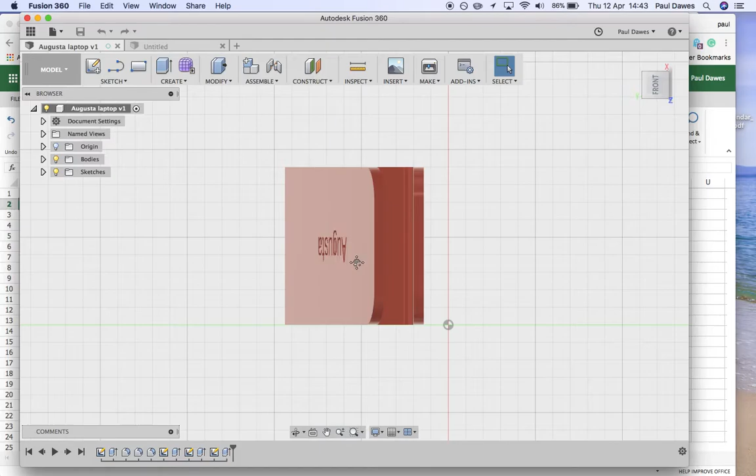When you open up Fusion 360, there's a couple of areas you need to know about on the screen. The first thing is this view cube. That's the thing that allows you to move around, rotate around, and if you end up zooming around and get completely lost, you can hit the home button and that'll take you back to the very first part.

Along here is the history timeline. I can go to various parts of my timeline and make modifications without affecting anything I did further on. So it's like a Control-Z, but you're only making modifications to the one thing you want to change.

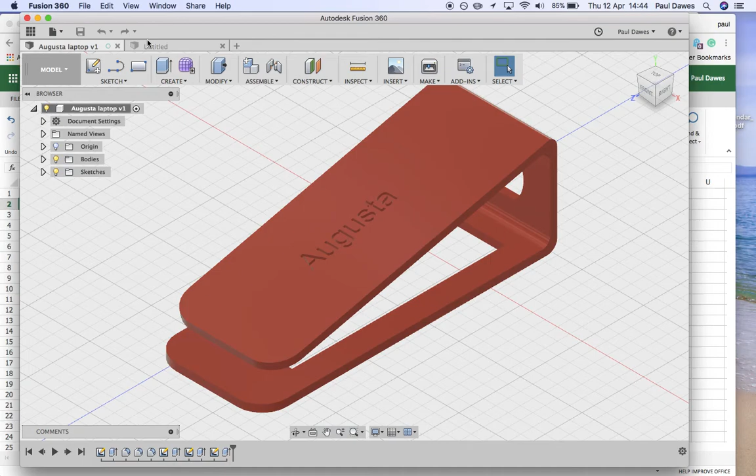So I'm going to start by opening up a new document, and the first thing I'm going to do is save that as a laptop stand, whatever I want. What I'll do is start by drawing in 2 dimensions first.

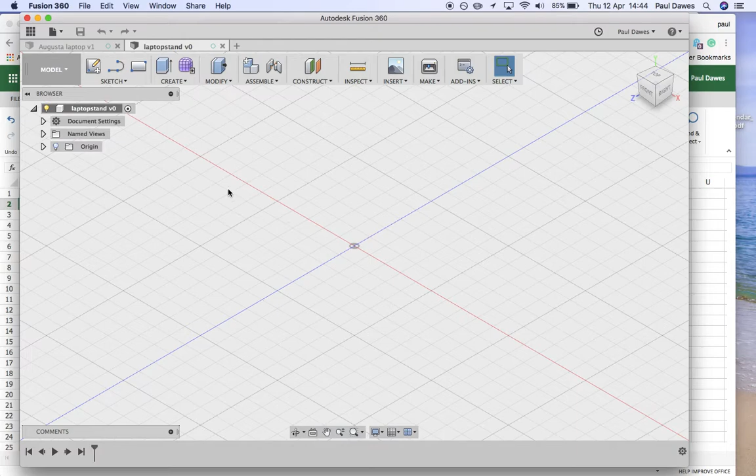So I need to create a sketch, create sketch, and I'm going to draw on this face, the YZ plane.

The first thing I'll do is create the base part. Can you see how that's highlighted? I'm going to have a 5mm thick piece of acrylic, and I'll make it by clicking my tab. I'm going to make it 140mm across. Hit enter, and I've got my first part.

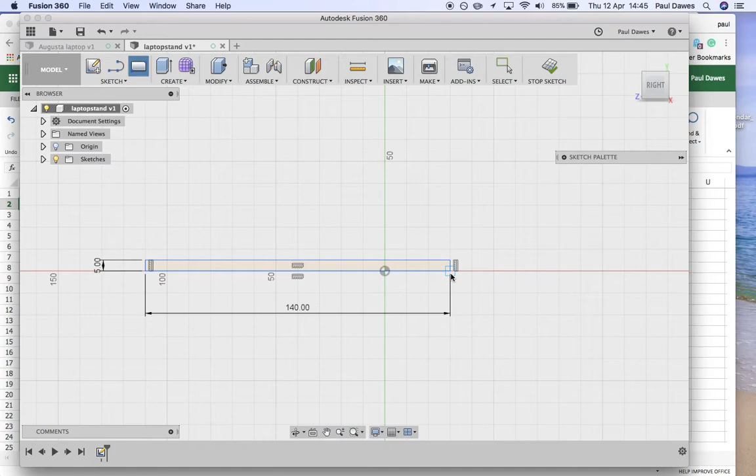I'm going to do another rectangle, and this time make it 40mm tall, tab, and still 5mm thick. The next one's going to be a little bit more difficult.

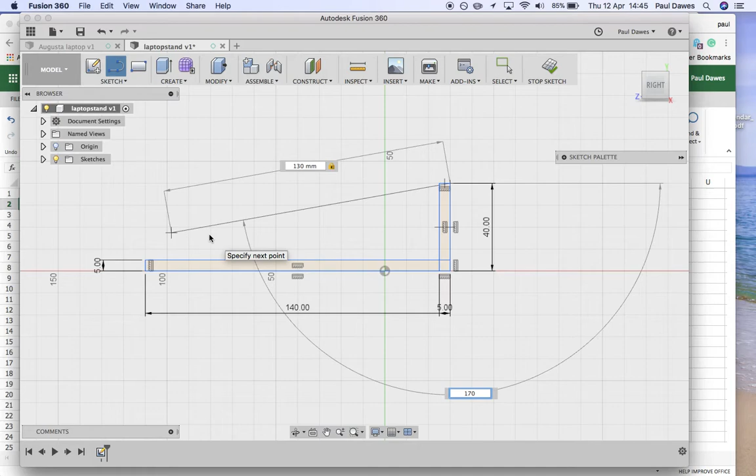I'm going to do a sketch of just a line. I'm going to draw a line from there, and make the line 130mm long, and the angle 170. Does that look alright? That looks alright, yeah. Enter. So I've got a line there.

I haven't got any thickness there yet. What I'm going to do is go sketch, offset. I'm going to offset this here, 5mm thick. Enter, and I've got that.

So now all I need to do to turn that into a full sketch is close it up. A line from there to there, and a line from there to there. Can you see how it's all gone yellow now, or orange? That means it's a full shape. Before, this was just joined with lines, but now it's a full shape.

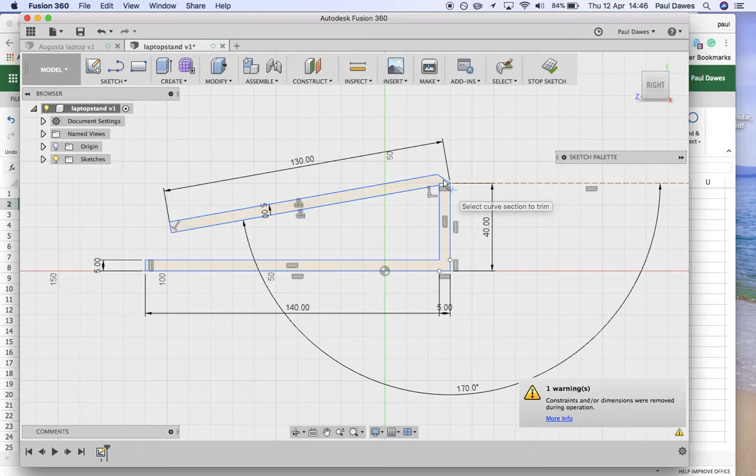I'm going to finish by trimming off the lines I don't want. So I can go sketch, trim. I can delete that, that - oops, Command Z. No, I'm going to leave that like that. I'll delete that there. Trim, yep, and I'll trim that off as well. Okay, how does that look?

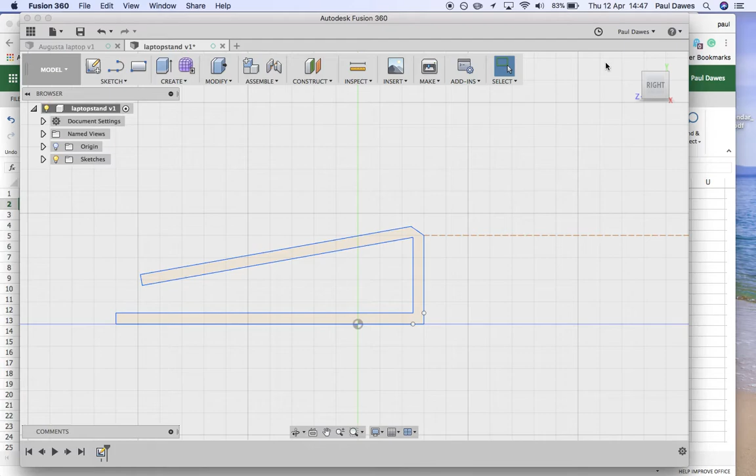Looks alright. So I've finished my sketch, stop sketch. I can go back home and you can see that's what I've got. Now all I need to do is extrude.

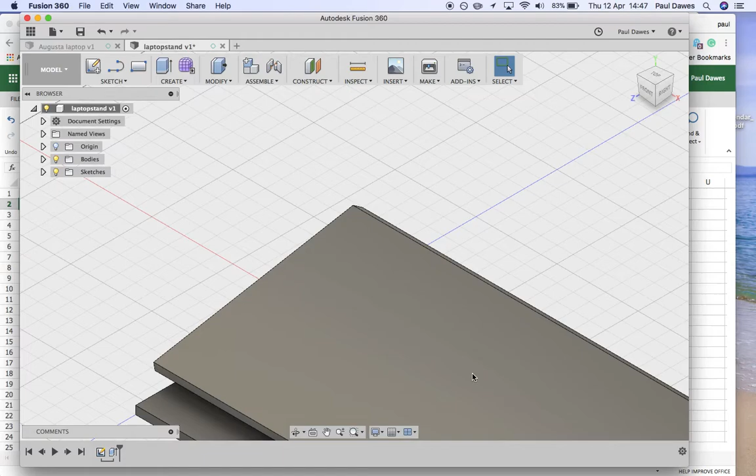So I can grab that component there and drag it through. Now I want mine to be, let's say, 230mm. Okay, enter. Yeah, I've got this. If I hit the home button, it'll take me back and show me the whole thing.

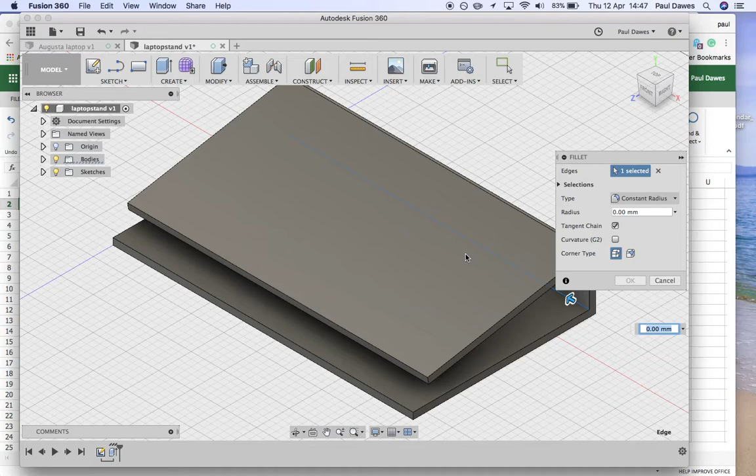So I've got that. That looks alright, doesn't it? A bit boring, but it's getting there. Now I'm going to show you a couple of really basic things to make that look a little bit more interesting. For a start, I'm going to make this look like it's been curved. So I'm going to go and fillet there, sorry, trying to.

I can't get in there. Can you see there? I'm going to fillet that about 3mm. Okay, enter. Now, there you go. Sorry, my mouse is playing up.

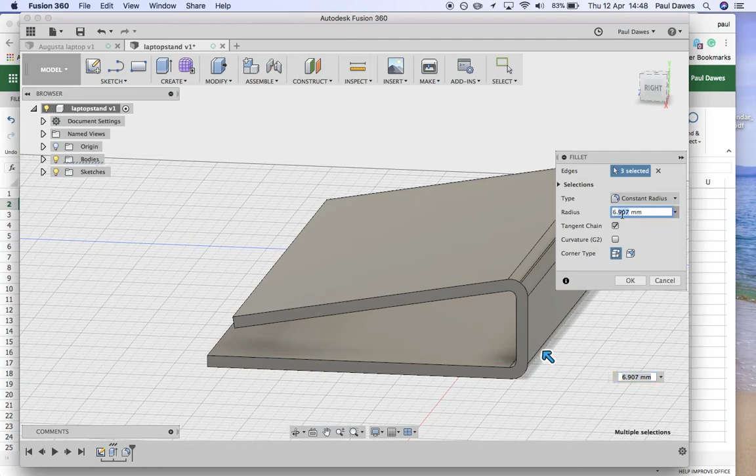So that looks okay, I filleted that. I'm also going to modify fillet that, and that. Let's see whether I can make that look pretty nice about there. What do you think? It's 6.9 millimeters, I'll double click on that and make it 7. See how that looks, that looks good. Yeah, that's starting to look like a proper laptop stand.

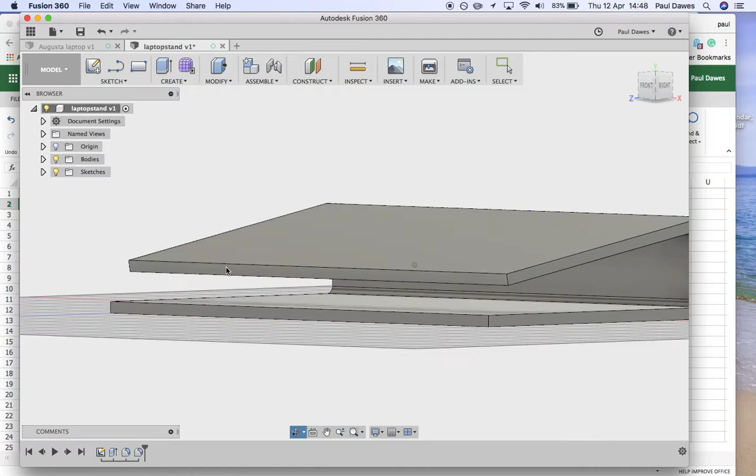But what I need to do is I actually need to have a little lip up here, don't I? How am I going to have a little lip up there to stop the laptop from falling off? Okay, I'm going to go around there. What can I do? There's a number of ways of doing things. What I could do is I could draw a little thing on there and drag it up. Oh, that's what I'm going to do.

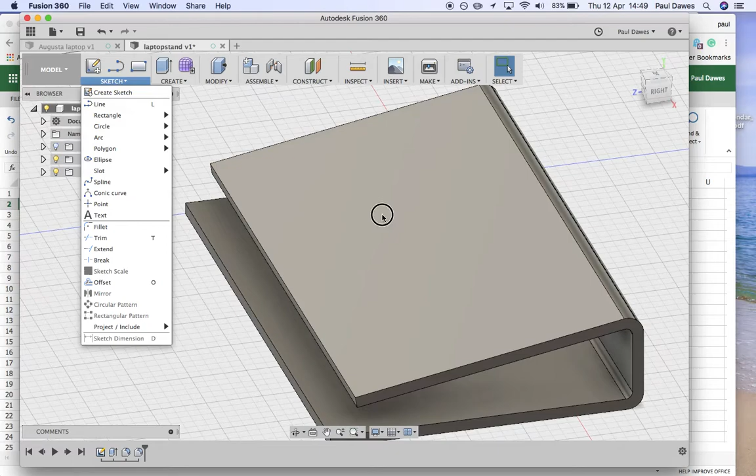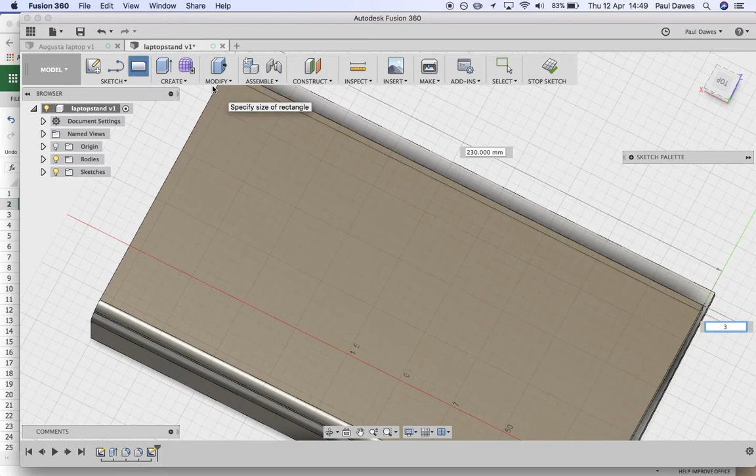What I'm going to do is draw a sketch on this face here, I'm hoping, and then create a box that is how long? 230 millimeters long and 3 millimeters high. So I'm going to go 3 millimeters high and 230 long. Enter. Stop sketch. Go back home.

So that was a bit confusing, wasn't it? Now I've got this line along here. What do you think I can do with that? I can go create, press pull that up. How high? Maybe about 7 millimeters high. I've got a 7 millimeter high thing there. And then I can go and fillet that and fillet that.

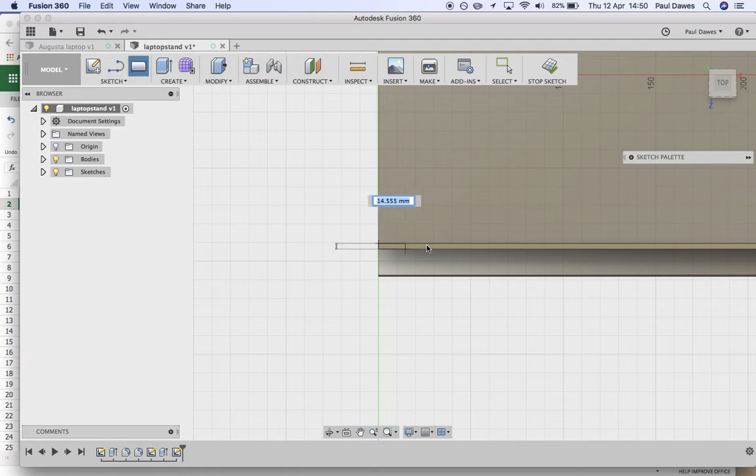I don't really want it to go all the way across. So actually what I'm going to do is I'm going to draw another box on that face. I'm going to make that 3 millimeters by, say, 60 millimeters. Oh, did I do that right? By 60 millimeters. Enter. Okay, and then panning it across, and I can pan by holding the scroll button down and moving my mouse.

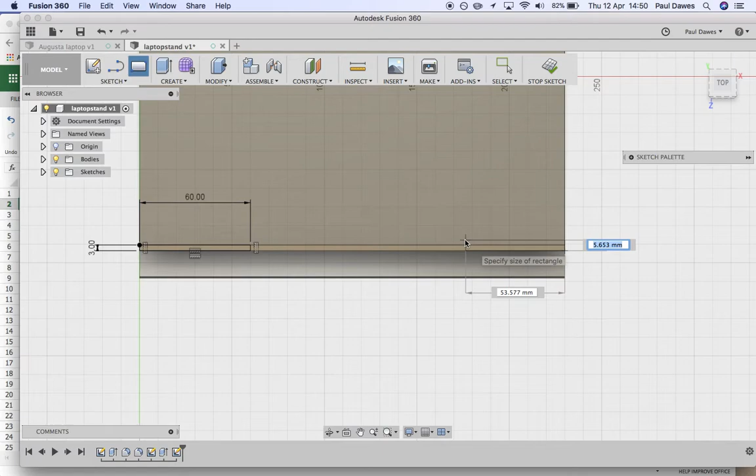And then I'm going to do another one here, 3 millimeters by 3 millimeters by 60 millimeters. Enter. Okay, stop sketch. Now I've got that and that, and what I'm going to do is I'm actually just going to push-pull that part down. Yeah, I don't really know how down I want it. Do I want to go all the way down? What I can do is I can go down to, not to a distance, but to an object.

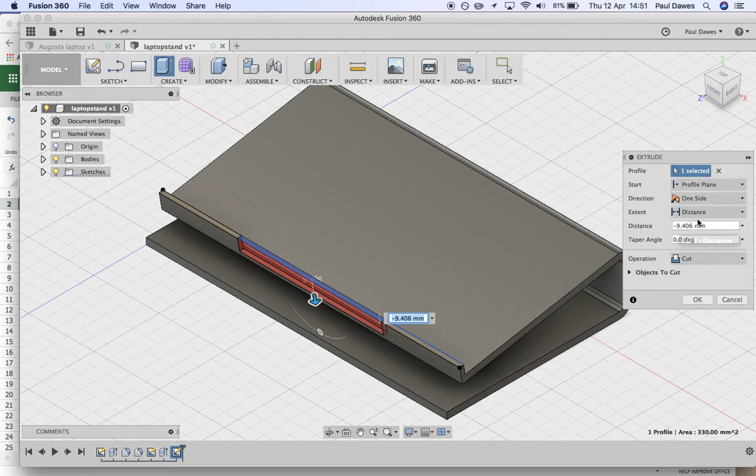I want to go down to that object there. I want it to be flat. And I'm going to hit OK. Yeah, so now I've got that. And now I can do all the nice pretty stuff.

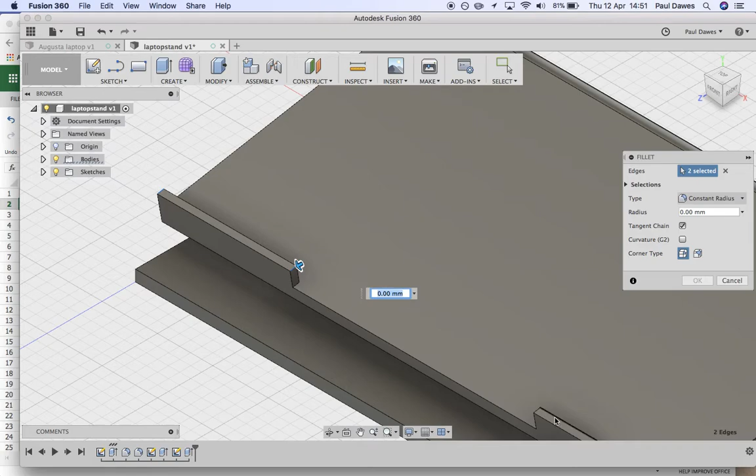So I can fillet that line there, that line there, that line there, and that line there. I can make that all filleted. Oh, that looks good, doesn't it? It's about there, I'll make it about 7 millimeters. That looks good, and it's starting to look good, isn't it?

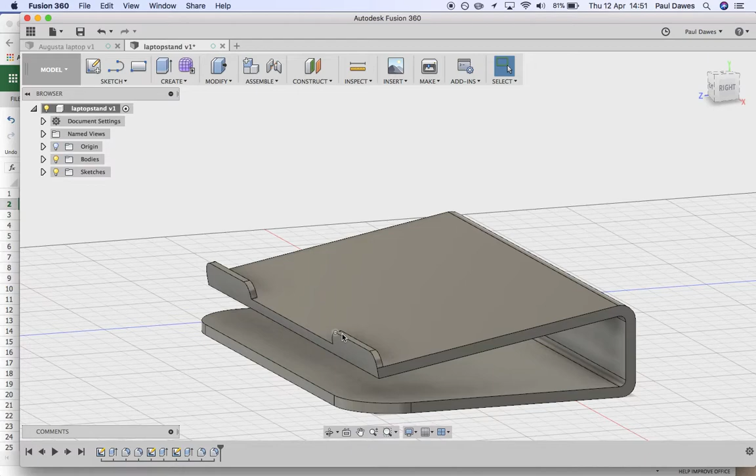Maybe I'll fillet that and that as well. So that's looking good. And then the final thing I'm going to do is, let's go back to home. The final thing I'm going to do is put some writing and cut a hole in there. So I'm going to do a sketch, create sketch on this face here. I'm going to create a box that goes from about there down to, does that look right? To about there. Okay, stop sketch.

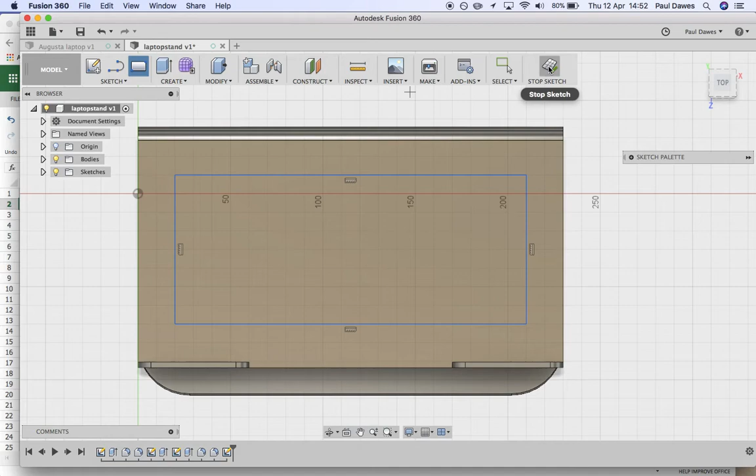And then again, create, push pull, just pull it through. If I push it too far through, I'm going to go through the bottom as well. So I'm just going to go through about that far there. I might go through the bottom, I'm going to do that. How does that look? That looks cool, doesn't it? And now I'm left with that. Oh, that looks much better.

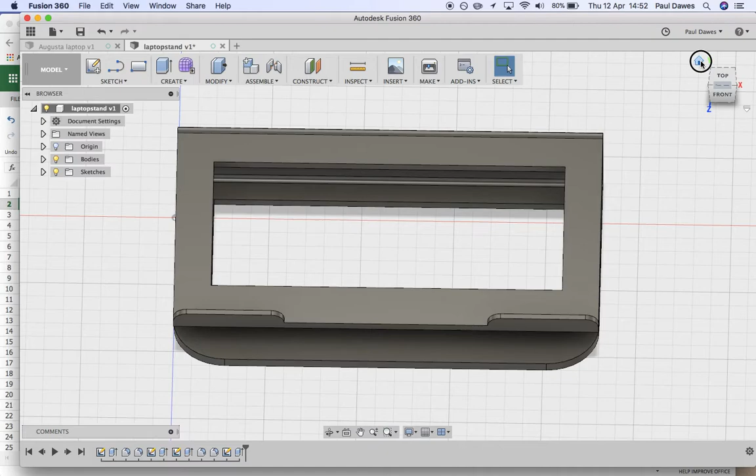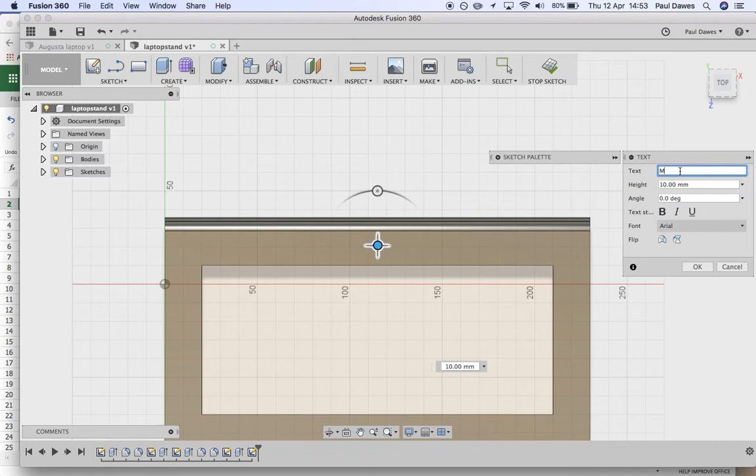And then I guess the final thing I'm going to do to make it look really good is put my name on it. I'm going to go sketch text on that plane. See that little triangle? That means it's the midpoint, so I'm going to put it right at the midpoint. Text, I'm going to write Mr. Dawes, and make the font height 10 millimeters, angle 0 degrees.

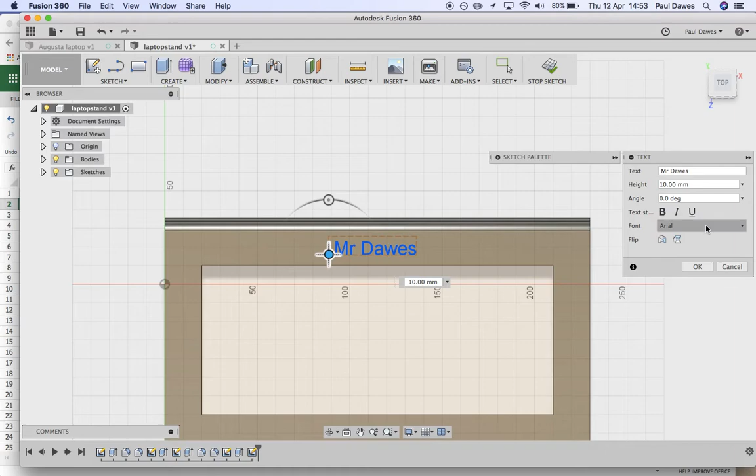I want to move it over to there a bit, that looks a bit better. And Arial, whatever, bold, yada yada yada, you can choose. Hit OK.

Stop sketch, and I've got that in there. What I'm going to do is pretend that it's been etched in, so I'm going to etch it minus 1 millimeter. Can you see that? It looks like it's been etched in.

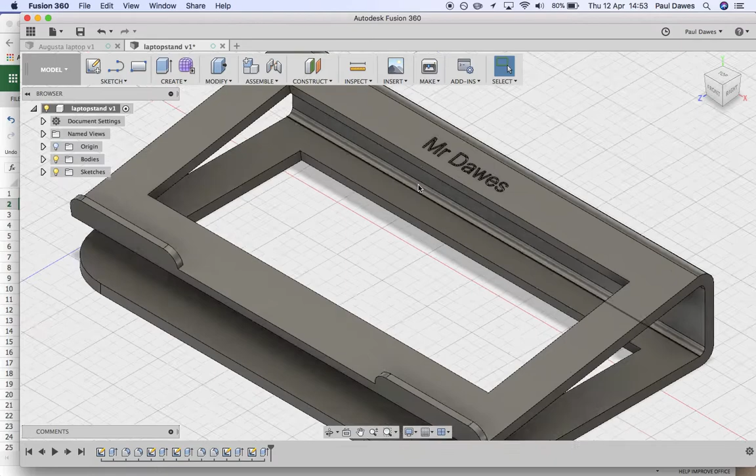So if you're wanting to make your laptop stand look a bit more interesting, you're going to be doing little graphics and things like that. Maybe you've got a symbol you can choose, or you could bring one in as a JPEG or even as a Corel Draw file. You could insert it here and then do the push-pull.

After this, other things that are really important to do are things like filleting. Filleting is a really important thing and it makes it look good. You could fillet the edges here, but with a laser cutter it's not going to look like that. You could also fillet this and not make it so square, make that round as well, but I'm not going to bother doing that.

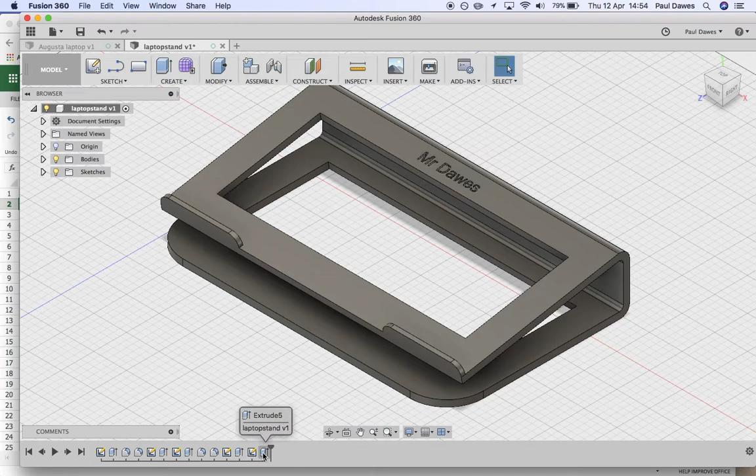What I am going to do though is show you how you can make some changes. If I go through here, this extrude and sketch is actually the Mr. Dawes text, and the previous extrude and sketch was that one there. Now I've decided I don't actually want to extrude all the way through both of them, only through one, through the top.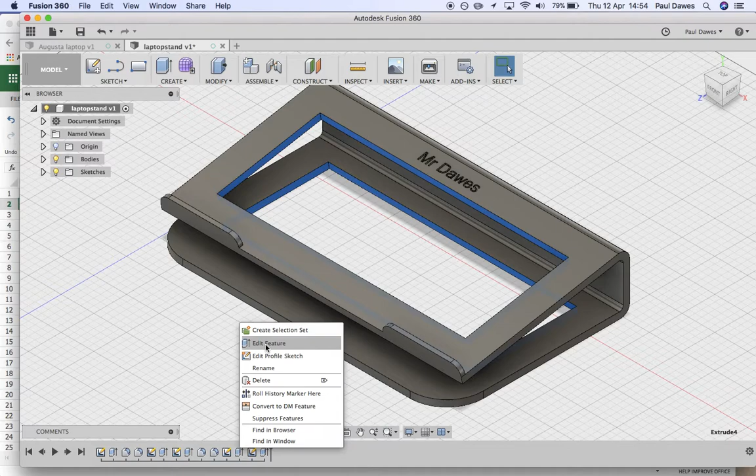So I'm going to right-click on this and edit that feature. At the moment it goes down minus 100, I'm going to pull it back so it just goes through the first one, and hit OK. You can see it's made the change I asked for, but the Mr. Dawes text and everything else is still there.

I could go all the way back to the start if I wanted to make a change. So if I went back to there and edited that sketch, I could extend that out if I wanted, and then go and trim that and stop sketch. I'm hoping... oh no, it didn't work.

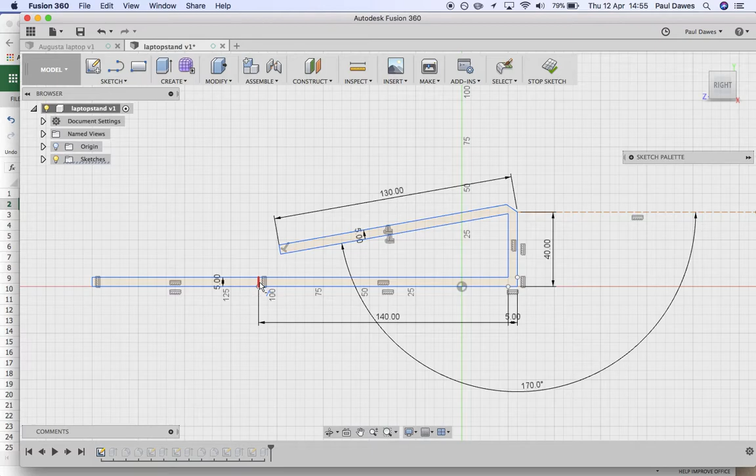Sorry, let me go back. See, it's still there, let's go to edit that sketch. I didn't trim, so let me trim that. Now let's see whether that's going to work. See, I've done that. Yeah, okay, I don't really like that, that looks silly, so I'm going to undo that, undo that again, and again, and then it's fine.

But you can see what you can do: go into the history button and make changes. If you get lost, remember the home button works there. Really, you're starting to sketch in 2 dimensions and then pulling out in 3 dimensions, making modifications like filleting to make it look pretty, okay?

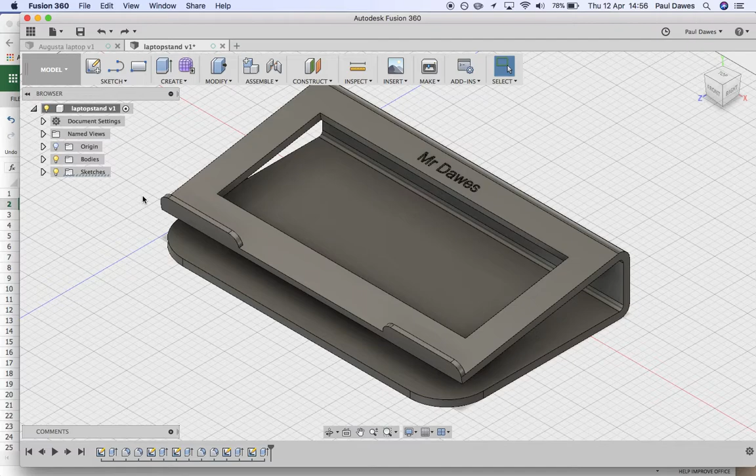And then you're finished. If you want to, Google Fusion 360 create orthogonal or orthographic views, and you could turn this into an orthographic drawing as well, but I'm not going to show you how to do that. You can work it out yourselves.